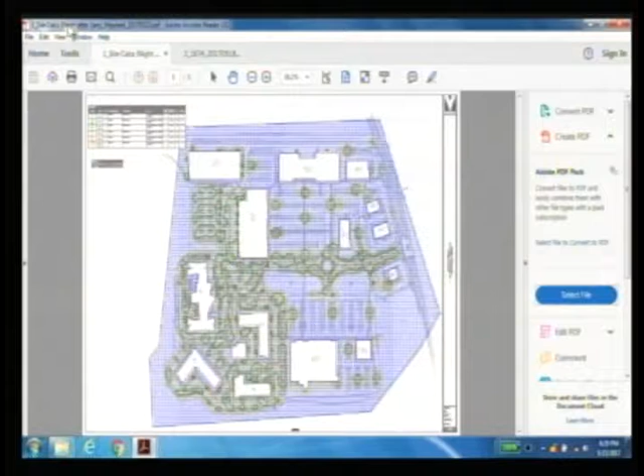In general, the lighting after 1 will be to light the main entrance drive, the project, and the residential area. And then this back area here where there's a proposed health club tenant that's 24/7. And then lights that are sprinkled out through the site to provide general lighting so that there's no completely dark corners of the site.

The code requires that 1 to 2 hours after a business closes, the light should be reduced by at least 30%. So what we're proposing is to reduce the lights that are on after 1 a.m. to 50%. And those lights that I just described are the ones that will be on from 1 to dawn. If you look at the plan closely, you'll notice that in order to produce this plan, we just took the lights off the plan that are turned off. We just created a ton of work for the lighting designer. So that's why some of the lights appear to be missing, but they are still on the regular photometrics plan.

So in general, the blue numbers, which are kind of hard to see, all the blue is 0.1 foot candles or 0 foot candles. The plan before showed the perimeter all at 0, and now the 0 line moves further into the site on all sides. And then these green lines show light levels that are 0.5 foot candles, and those are the areas that we're trying to light for security. So this plan shows an average of 0.2 foot candles with a maximum of 1 foot candle.

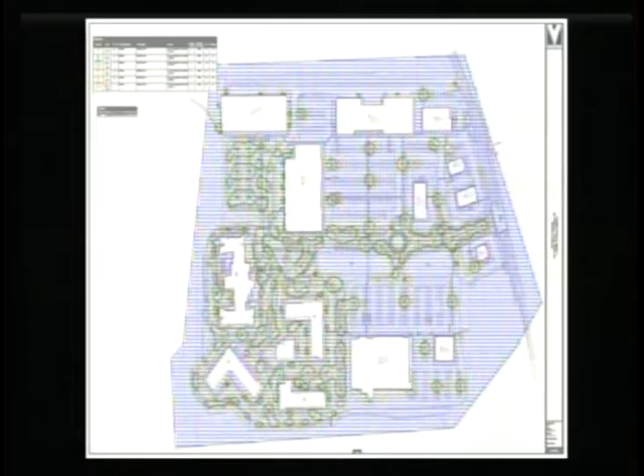Just to clarify, I don't need to see photometrics on the wayfinding. I just think it'd be important to understand if that will go off. I think it may be appropriate that certain wayfinding lights after a certain time could be just headlight illuminated. And detail on local and global control issues, where lights are locally controlled and where they're globally controlled. So maybe it could be like a summary? Yeah. I wouldn't imagine that's any kind of a diagram, sorry.

In terms of the actual illuminated signs, the logo types, Bill, would that be under the individual sign permits, or should we consider that now? Presumably whether it's the signage light, an individual tenant building light, or a site light, the board has the ability to dictate lighting of this level has to be on or off. It doesn't matter who has the light switch. You have the ability to say, this is what we are and are not accepting of when your lights are on or off.

And then it would be up to the landlord, the property manager, to make sure that those people that have control of lights are following the rules that have been dictated by the planning board. So, yes, it's within your purview to say sign lights and building lights have to be off at a certain time, but site lights can stay on. That's up to you to make that determination. Yes, I would concur, and that's an important point, that it's up to the board to make sure what its preferences are.

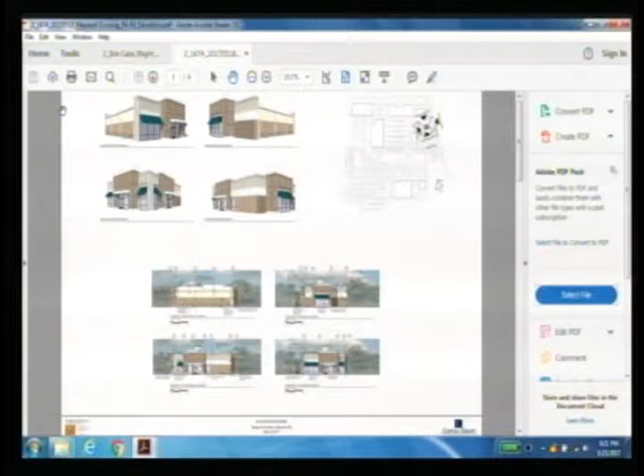If the applicant is planning on actually building the traffic lanes the way they're shown. If not, if they suddenly said, well, there is no drive-through for this building, we're gonna eliminate those drive-through lanes, that's a change they'd have to come back for, because they're changing the traffic pattern. On the other hand, I would argue that they're effectively coming to you with a change now, by virtue of there being no openings, no canopy, nothing for a drive-through here architecturally. They're essentially changing what I at least understood was coming when we did the conceptual plan. They talked about a drive-through here, and that's part of what it is.

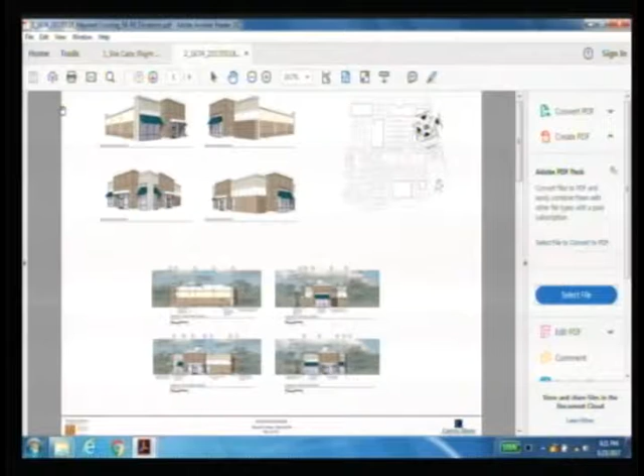I don't know that one or the other is more or less challenging or appealing to the board in terms of process. But clearly a change is being proposed from the concept plan in either the traffic or the building. There is no drive-through.

Later on, you're approving the colors and the layout of all of these buildings. Clearly, if somebody were coming back and adding the canopy and the posts for a bank, where you've got those teller machines, or a new opening in the facade where a Kentucky Fried Chicken has their drive-through, bad choice or whatever, that would be a subsequent change to the facade significant enough that it would require them to come back to you as a change to the approved site plan, one way or the other.

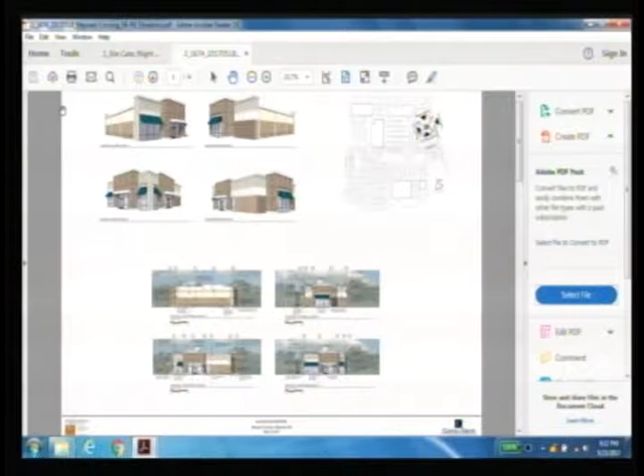Right, thank you. And I agree that in my estimation, and from what I'm judging by the plan, well, I don't know if we have the latest and greatest overall site plan as of today that was just submitted. We do have a mismatch between site plan and the proposal. So if you guys want to just clarify whatever direction you want to go there.

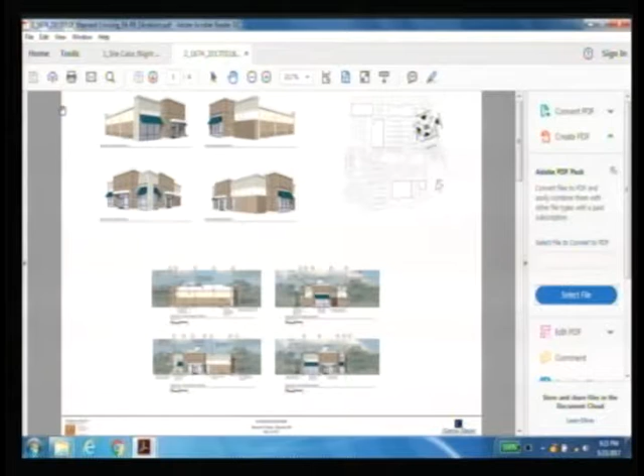And it would seem the good news, in my view, would be that if you're eliminating the drive-through, then you're gaining a lane's worth of space that you can plant some trees in or something and pretty up that north elevation of that building. And you still would then have, I think, 2 lanes on the other side. So we look forward to seeing that. An amended landscape plan. Just something, not 3 lanes of traffic. So yeah, sorry. Snow storage. You can continue, please. Any other questions on 7? I don't think so.

The rest of the colors are neutral with stone and EIFS. So the front elevation, again, is facing the main entrance. So the north elevation is the front elevation, well, it's the west elevation actually is the front elevation where we're showing the door. So the north elevation is just a nice looking elevation. And then it's the same with the east elevation because it's facing the road. And then the back is the south.

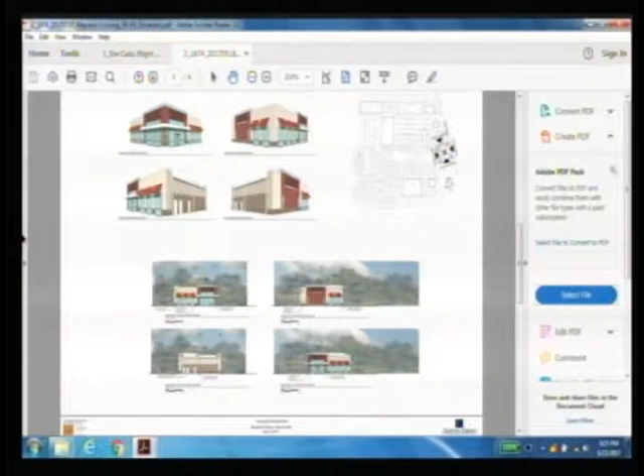Actually, this one, I feel like just having one less material makes it feel more consistent, especially with the other structures on site, since there's not so much going on with the other ones. The only slight comment I had is it would be nice if the headers and the transom and the awnings align. Especially since you're using the awnings to kind of create an illusion of a transom under there, presuming from the angle that it doesn't look like there's actual transoms under there. No. I mean, alternatively, they could be pulled down if you wanted them to line up, but it'd be nice if either they lined up with the cantilever canopy or the headers of that main glass corner feature.

The dumpster for this building is in the southwest of that portion of the parking lot, is that? Yes. Okay. So, I'm just going back to the other dumpster, you had indicated on that plan, it's indicated there. It's not showing up in our plan for some reason, but we'll just mark it in. Okay. Okay.

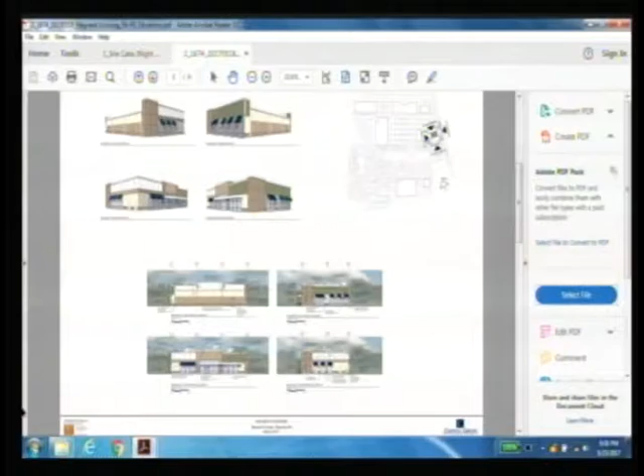Any comments from the public on any of this presentation? Well, you started the discussion. The reason I raised my hand was because I heard that it did not seem to correspond, so thank you for bringing that up. I just have to ask, since most of these buildings are not against the property line with residences that you can turn your back to, they're visible all the time. Do they need to have a back that's such an obvious back? It seems as if it doesn't need to be as plain as it's shown. These buildings are gonna be visible on all sides.

To the comment on building 9, the south elevation is facing the parking lot, where most of the parking would be, and the east elevation is facing the back of an existing building, and then there's just a driveway. It seems like an odd place to put so much. If that's gonna be a drive-up, then the site plan doesn't show it. On the supermarket, there is a supermarket. Oh, well, I'm talking about building 9. So the south elevation is, if I'm reading this correctly, against the parking lot to the south, where most of the people are gonna park and enter.